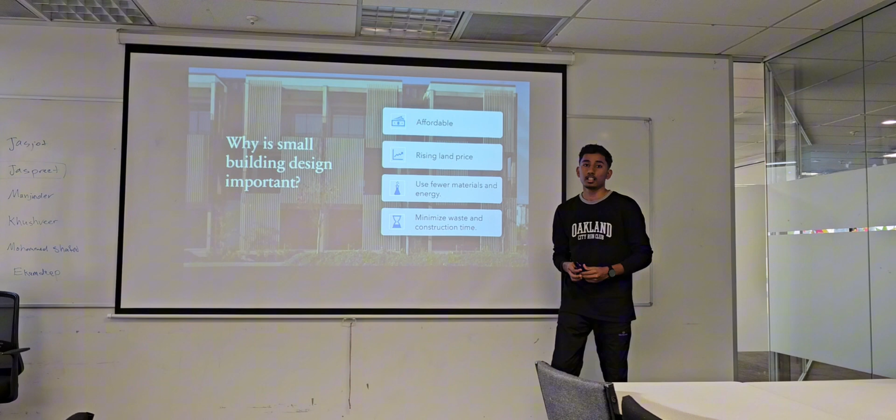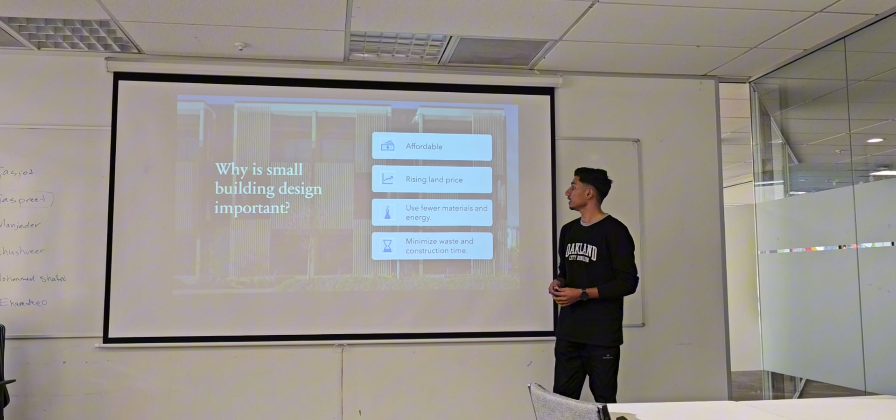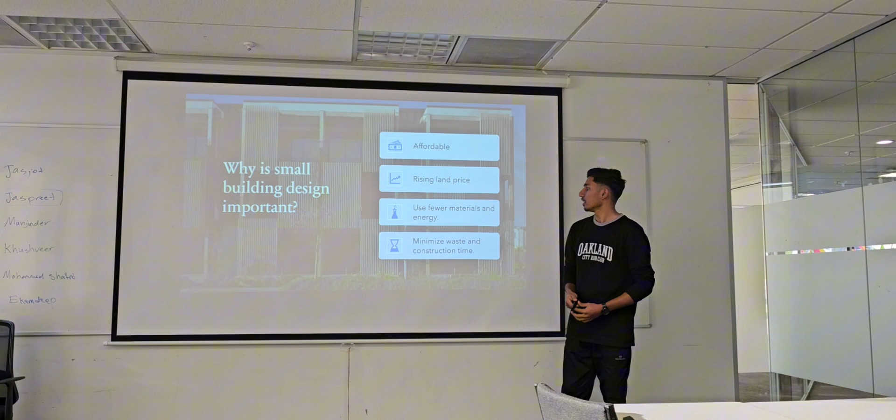So basically, why is small building design important? The first point is it's affordable, they are very cheap compared to large buildings. The second one is rising land price. In New Zealand, there's a lot of rising land price at the moment, so it's better if you design a small building, and it uses fewer materials and energy compared to larger buildings. For small buildings, they use fewer materials, labors, and AC, heaters, and energy. And the last one is minimize waste and construction time. Large buildings take a lot of time to construct, whereas small buildings take very less time to construct.

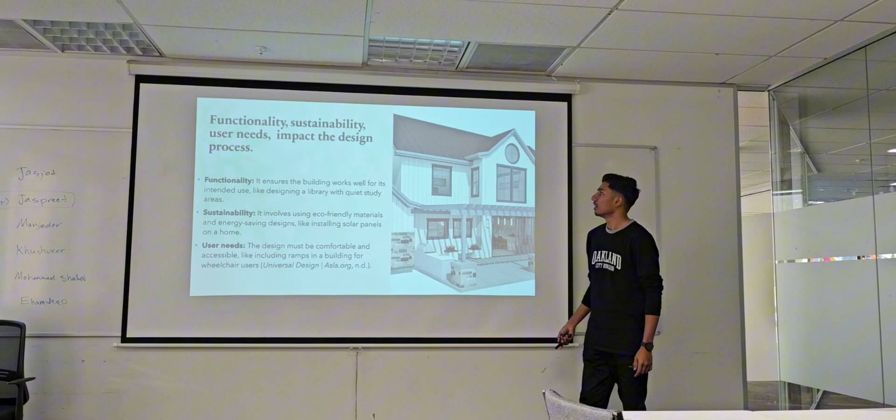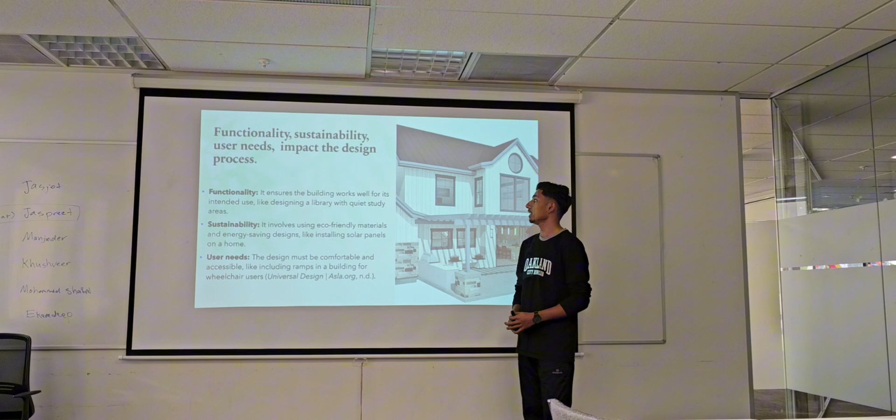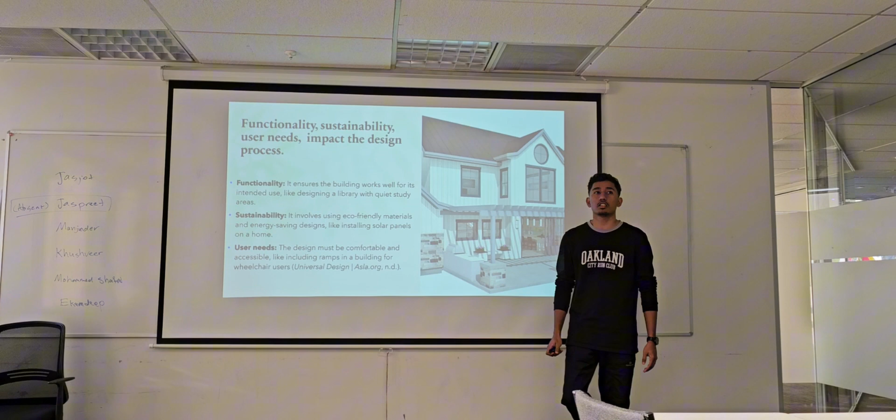The second one is functionality, sustainability, user needs, and how it impacts the design processes. Firstly, functionality ensures the building works well for its intended use. For example, designing a library, you have to make it a quiet study area where noise cancellation is taken care of, so noise from outside doesn't come in, and noise from inside doesn't go out.

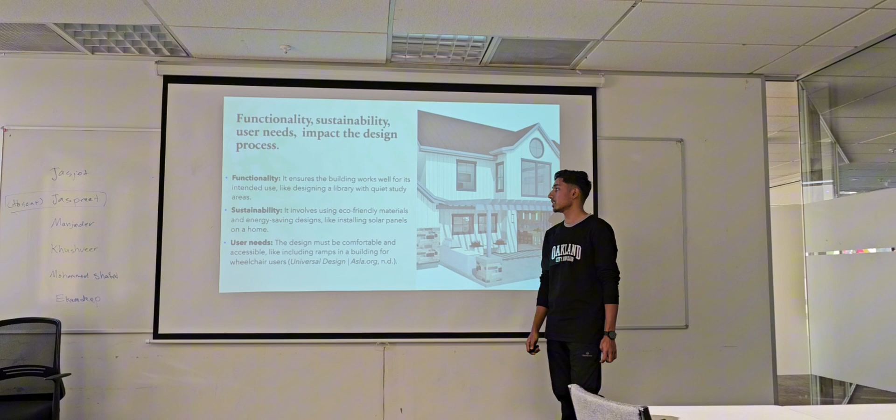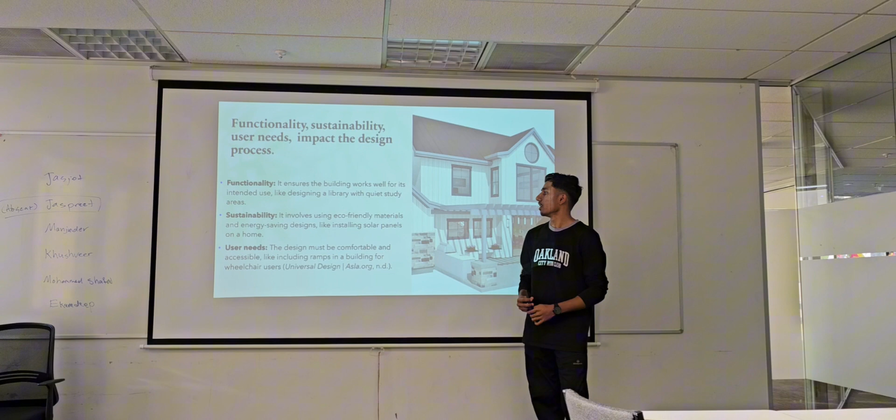The second one is sustainability. It involves using eco-friendly materials and energy-saving designs, like installing solar panels on a home. Installing solar panels on a home doesn't affect our environment, and it's a good thing from a sustainability perspective. The third one is user needs. The design must be comfortable and accessible, like including ramps in a building for those people who are wheelchair users.

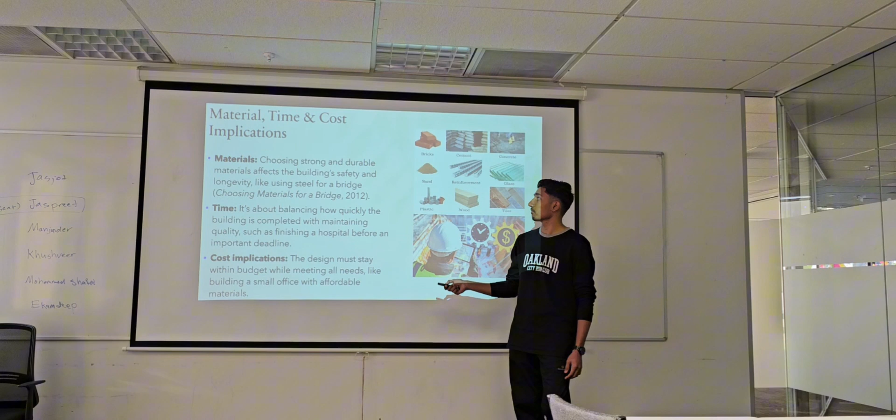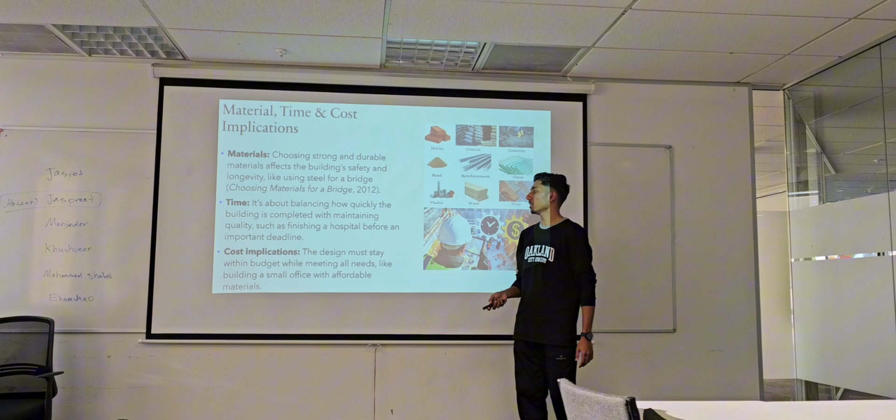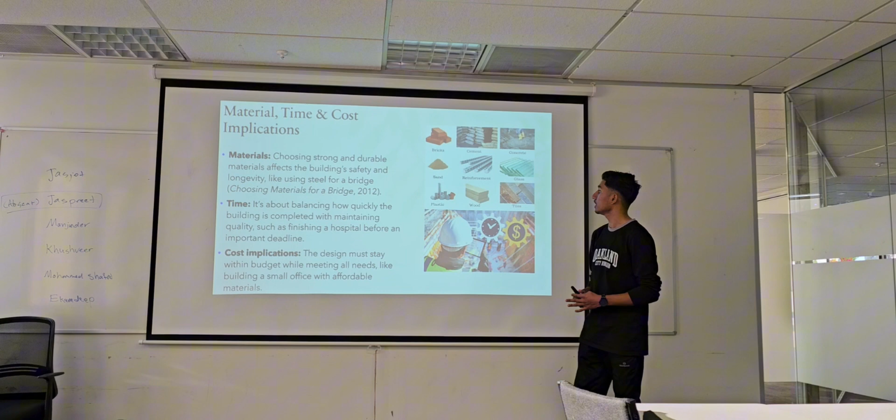Material, how it impacts: choosing strong and durable material affects the building's safety and longevity, like using steel for a bridge. The second one is time. It's about balancing how quickly the building is completed with maintaining quality, such as finishing a hospital before an important deadline. If you finish the construction before the deadline, there will not be dispute resolutions. The last one is cost implications. The design must stay within the budget while meeting all needs, like building a small office with affordable materials. So you can see some pictures here of materials: bricks, cement, concrete, sand, plastic, wood, tiles.

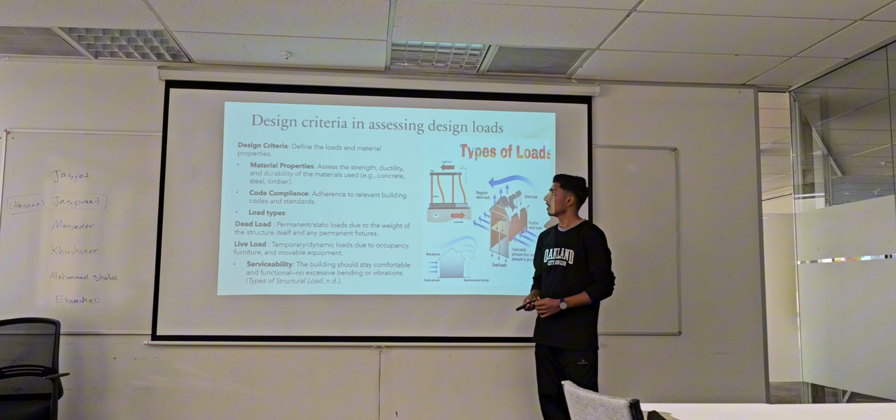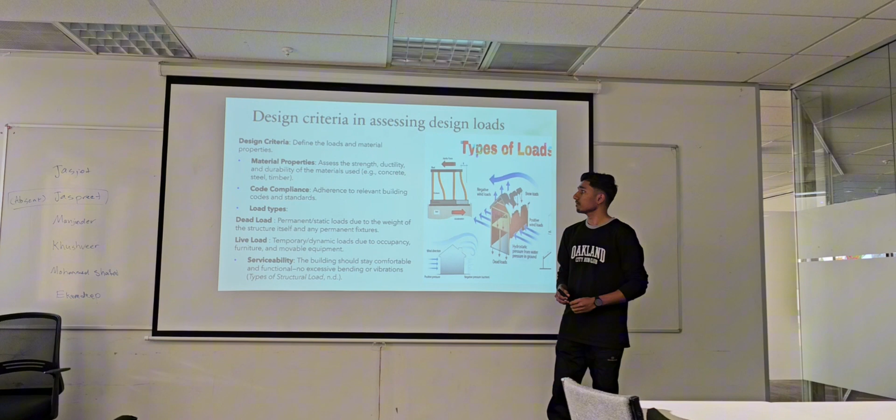So the design criteria in assessing design loads: design criteria simply means the loads and material properties. For material properties, you have to assess the strength, ductility, and durability of the materials. Example, how strong concrete is compared to timber, and how strong steel is compared to concrete. Using code compliance means adherence to relevant building codes and standards, so you have to keep in mind the codes and conducts.

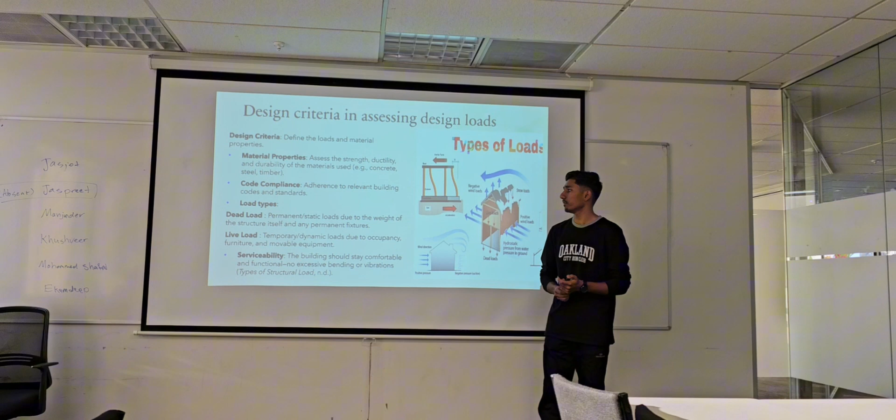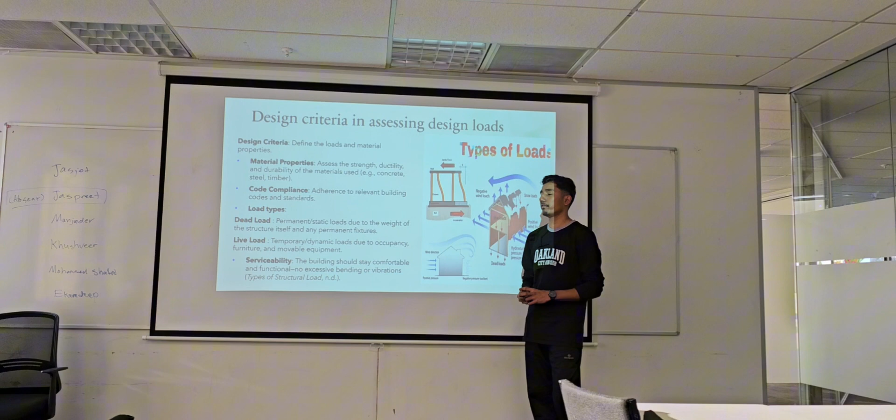So load types: there are two types of loads, dead load and live load. Dead load simply means permanent loads, and live loads are temporary loads. Dead load is the weight of the structure itself and any permanent structure, and live loads are moving loads like furniture and people. The last one is serviceability: the building should stay comfortable and functional due to no excessive bending or vibrations.

Safety factors in assessing design loads: some of the safety factors include code compliance, where we should follow local standards, and ductility and flexibility, where we design structures to flex and absorb energy without failing. The next one is foundation safety, where you should use safety factors for soil strength and behavior. If the soil is soft, then you should have a large, good foundation for it.

And load safety factors increase expected loads, for example multiply by 1.5. If a building is made for a school, then there should be 90 students, so we should multiply by 1.5 because it might have some gatherings, so we have to be prepared for it.

The next topic is exploring factors influencing design criteria selection. When selecting design, you have to keep in mind the location and environment. The first one is climate: the temperature should be good, and what about the rainfall and wind conditions? The next one is seismic activity: earthquake risk and soil conditions are major factors, so we should keep these in mind when selecting a location.

Building use and function: the purpose of a residential, commercial or industrial building and its needs. If a residential home is needed, what is the purpose and space needed? If an industrial building is made, what's the purpose and intended use? The regulatory requirements, building codes, local standards and regulations should be followed, and all permits and approvals should be compliant with legal and safety requirements, just because you don't want any fines in future, so you should have all these permits and approvals.

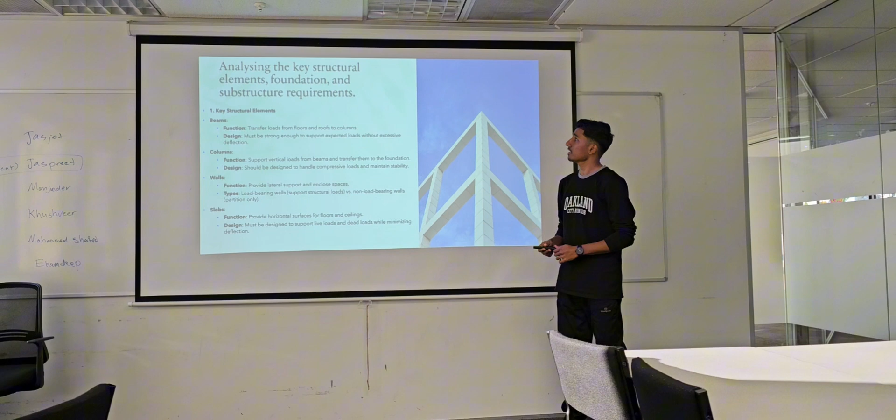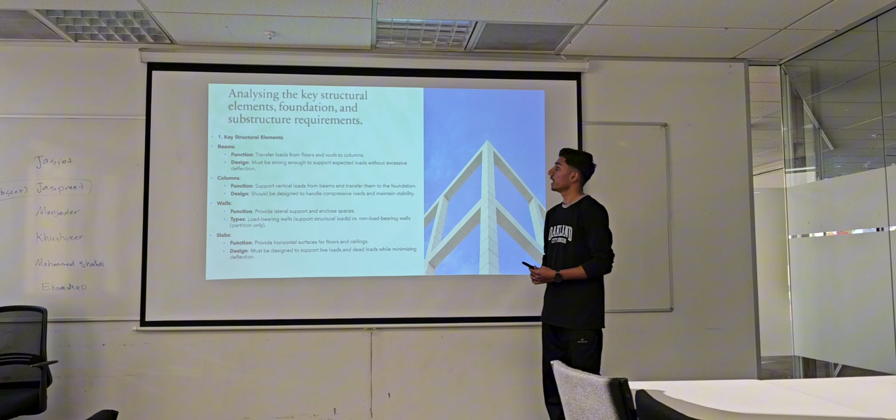The next topic is analyzing key structural elements and foundations and substructural requirements. First, key structural elements: beams. Beams transfer load from floors to the columns, and must be strong enough to support expected loads without excessive deflection.

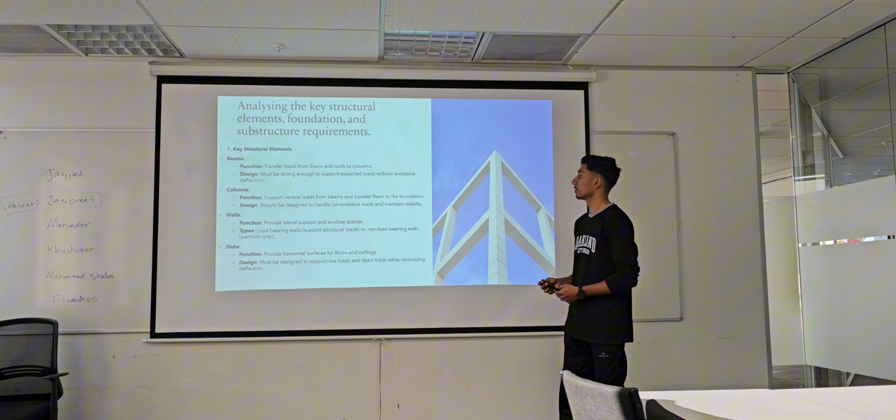The next one is columns. Their function is to support vertical loads from beams and transfer them to the foundation. The design should handle compressive loads and maintain stability.

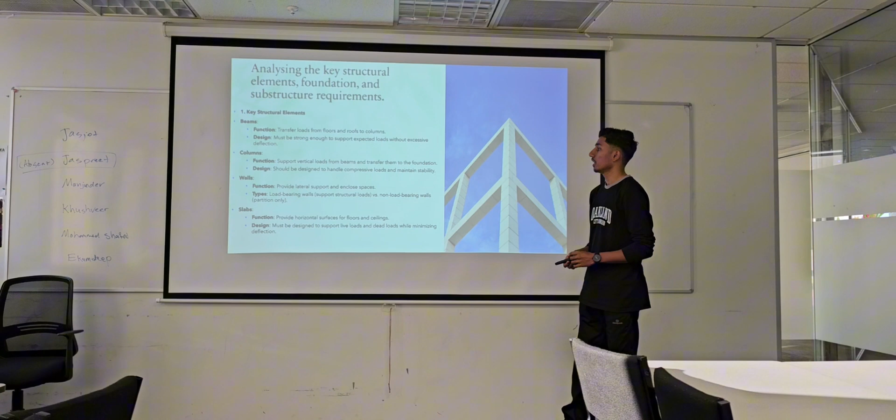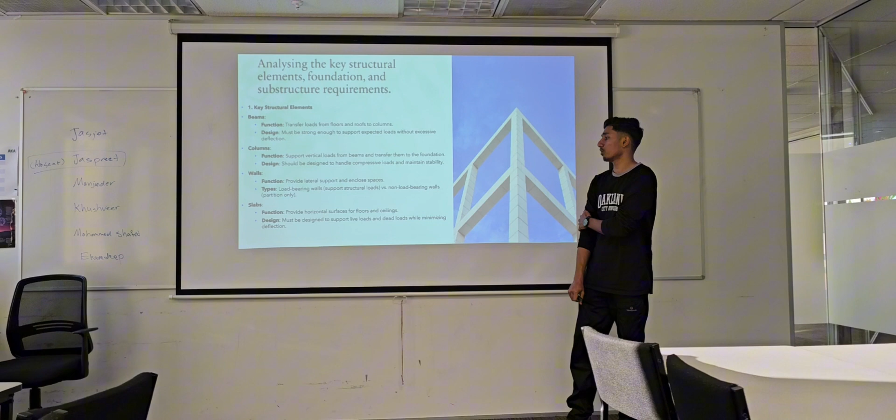Walls function is to provide lateral support and enclosed spaces. Load bearing walls support structural loads, versus non-load bearing walls, which support partitions only. We also have slabs, which provide horizontal surfaces for floors and ceilings. The design must support live loads and dead loads while minimizing deflection.

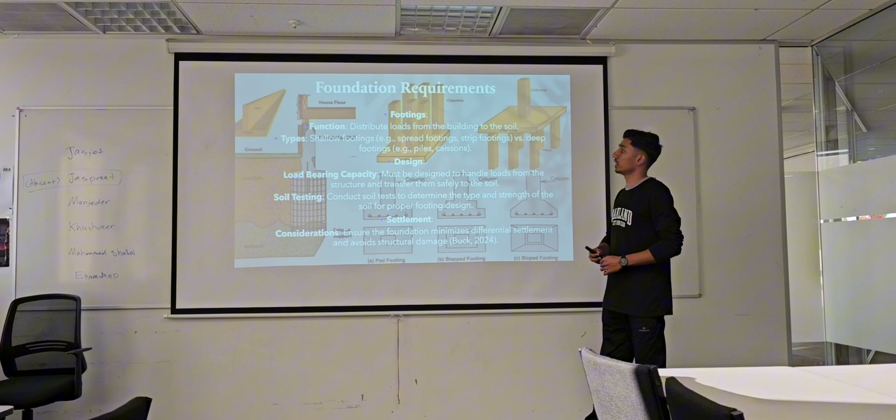Some foundation requirements: footings. Their function is to distribute loads from the building to the soil. Types of footings include shallow footings, such as spread footings and strip footings, and deep footings such as piles and caissons.

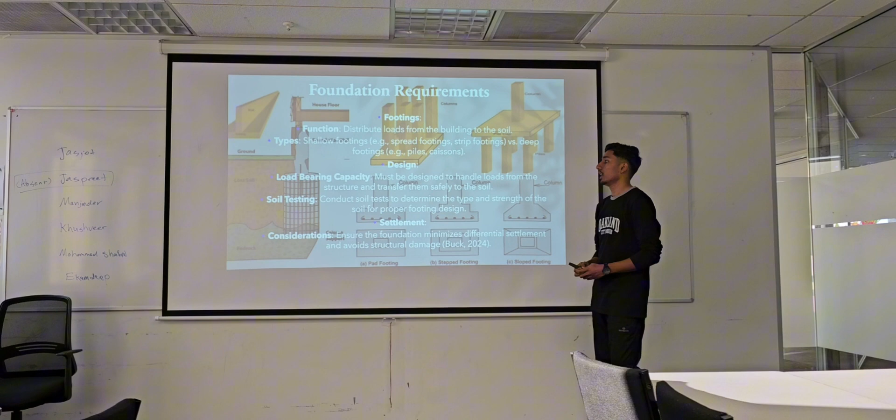The design must handle load bearing capacity, transferring loads from the structure safely to the soil. Soil testing should be conducted to determine the type and strength of soil for proper footing design. We should also consider settlement, ensuring the foundation minimizes differential settlement and avoids structural damage.